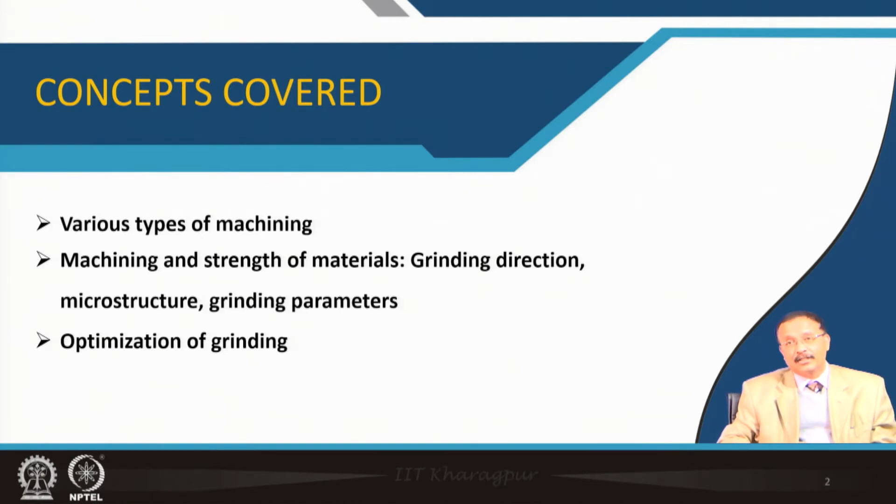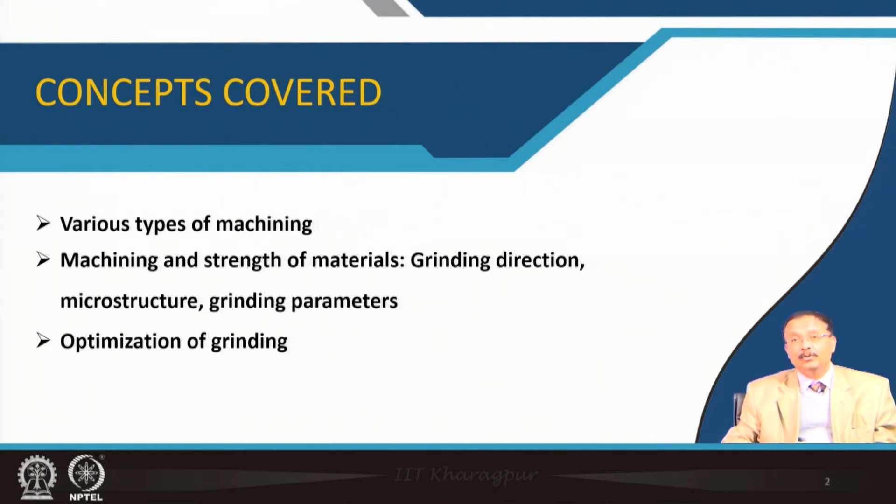For ceramics, machining is relatively complicated. First I will introduce various types of machining in a complete sintered ceramic article, and machining certainly affects the ultimate strength of the material. Factors like grinding direction, microstructure of the material, and several other grinding parameters influence the strength, and that will be discussed. Finally, how to optimize the grinding to get reasonably good strength of the finished product will be introduced.

Many ceramic surfaces, after sintering, are required to meet certain dimensional tolerance. So surface finish is also important, and to maintain the tolerance you need to machine it. Machining is not as easy as in the case of metal, because ceramic is a brittle material. If you want to polish glass or polish a turbine blade to make it more tolerant towards its dimension, it is really a tough job, a tricky job.

It is a tricky job to machine the sintered ceramic part, but broadly three procedures are followed. The first one is mechanical type, the second one is thermal type, and in some instances chemical mechanism is adopted to machine the ceramic part.

In mechanical machining, abrasive is usually mounted on the surface of some other material, and then the ceramic article is forced onto the abrasive surface, which sometimes is mobile, or sometimes you make the ceramic mobile, depending on the type of material we are talking about.

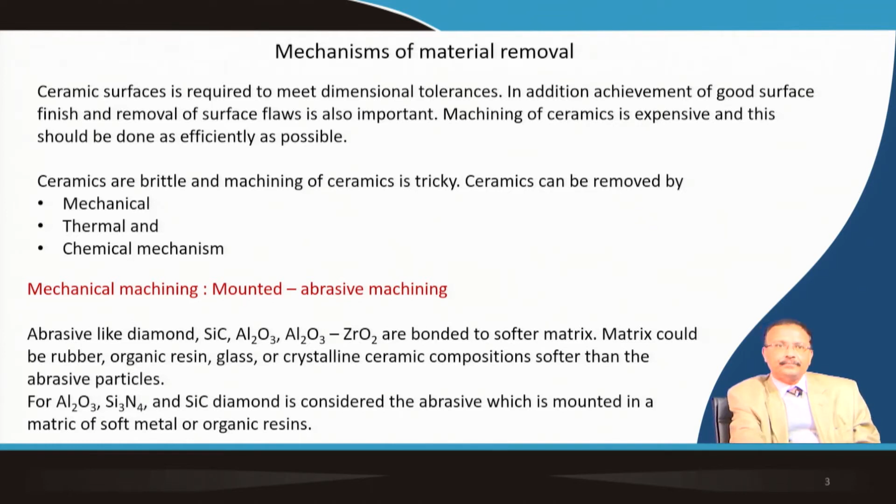Basically, four types of grinding are adopted for mounted abrasive tooling.

The first one is a conventional grinding wheel, which you are all familiar with. The second is a coated abrasive on a grinding wheel. The third has some kind of contour surface with the abrasive part. The fourth usually uses paper or cloth, with glue to attach the abrasive part - a common example being emery paper.

The removal of the ceramic article is achieved by moving the tool against the ceramic workpiece while applying pressure. The sharp corner of the abrasive is in touch with the ceramic, having a very small contact area, which applies a very localized stress concentration to remove the extra material.

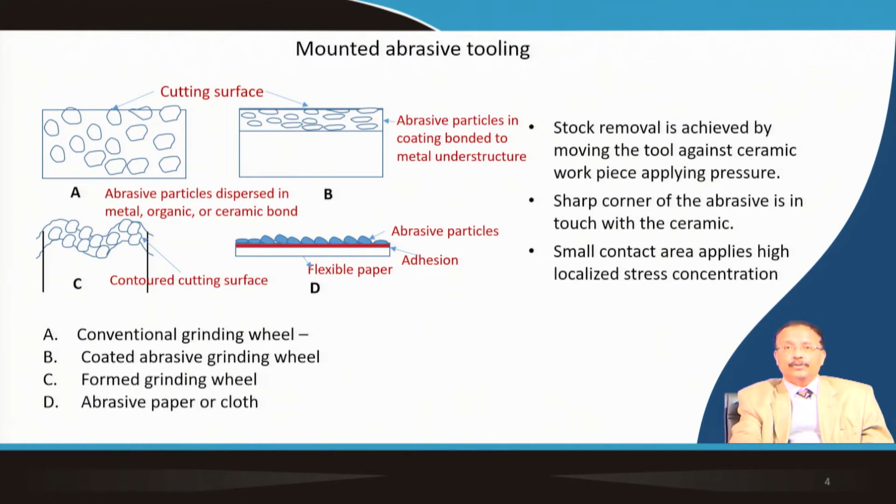Second, we have free abrasive machining, and lapping is one common example. The abrasive is taken in suspended form and put on a moving cloth to polish the ceramic article. This type of free abrasive machining is done when you need a final surface finish, almost optical finish - then lapping is usually done.

A soft cloth like velvet is used, but the removal rate of material is relatively slow. For certain bearings or seals, ceramic seals, usually a very fine surface finish is required, so free abrasive machining is needed there.

Sometimes this fine abrasive is also used to drill circular holes in ceramic material. In that case, abrasive is placed between the tool and workpiece together with a coolant, and pressure is applied simultaneously with rotation, creating a grinding action to make the hole inside the sintered ceramic.

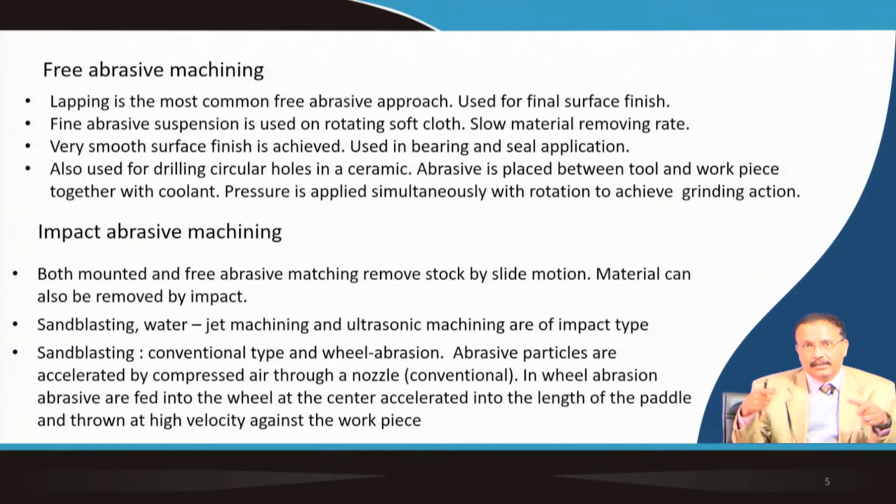In sandblasting, both conventional type and wheel abrasion are used. Abrasive particles are accelerated by air and pass through a nozzle in the conventional type. In the case of wheel abrasion, abrasive is fed into the wheel at the center, accelerated along the length of the paddle, and thrown at high velocity against the workpiece.

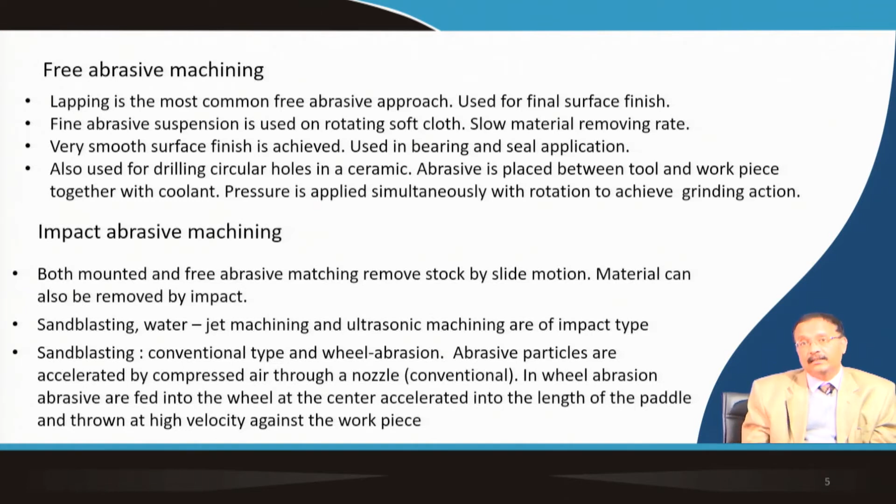This is sandblasting, basically used to clean the ceramic surface - maybe temples or old ceramic articles which have their own stains built up over the years. Sandblasting is usually used to clean the surface part.

For fabrication of engineering ceramics, sandblasting is usually not done. Wheel abrasion is also used for cleaning the surface. The size of the particle, angle of impingement, hardness, and velocity of the abrasive are the parameters to be controlled so that you can have effective cleaning action.

Water jet machining basically uses water as a carrier. It is pumped at reasonably high pressure, and this can be used to cut both metal and ceramic along with the abrasive part.

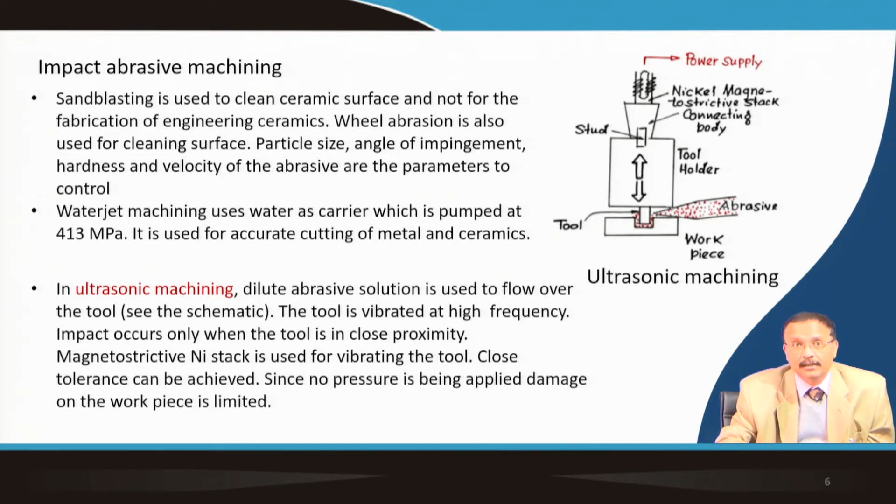The tool is kept in very close proximity, and abrasive, which is a dilute suspension, is thrown here. There is a nickel magnetostrictive stack that vibrates at ultrasonic frequency, and the abrasive particles are continuously flowing through this nozzle. There is no pressure between the tool and the workpiece, and by the simple impact of this abrasive particle along with the ultrasonic wave, a fine hole can be made, resulting in a reasonably good defect-free article.

Chemical machining is also done for the final finish, achieving a very good surface finish. A liquid is used in which the ceramic is basically soluble. For silicate glass, hydrofluoric acid can be used, or in case of alumina, molten Na2B4O7 solution can be used for the surface finish.

Where it is exposed to UV radiation, copper oxide is reduced by cerium oxide. Cerium is +3 valent, copper is +1 valent. So cerium is oxidized and copper is reduced to its metallic state.

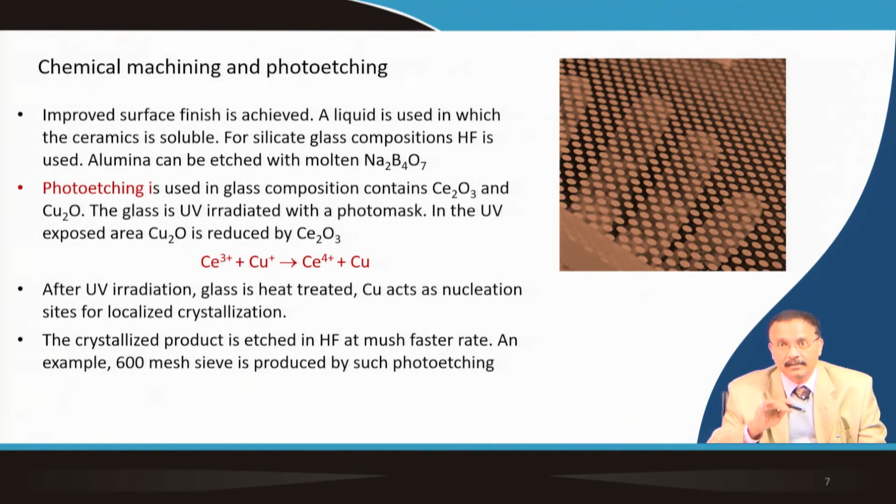You can make a very fine hole by this chemical machining followed by photo etching followed by chemical machining, producing a very fine 600 mesh glass block.

Electric discharge machining is applicable only to conducting ceramic material, or at least semiconducting in nature. This shape tool is kept in very close proximity to an electrode, and this distance is maintained by a servo mechanism which responds to the gap voltage. The whole sample is dipped in a dielectric liquid, and basically the samples are eroded by local heat.

This is one method to make bulk ceramic samples for observation under transmission electron microscope. Initial thinning of the sample, just after cutting typically a 3 millimeter diameter disc, is done by electric discharge machining to make it more and more thinner, and then final chemical polishing is done to get a region thin enough for transmission electron microscopy examination.

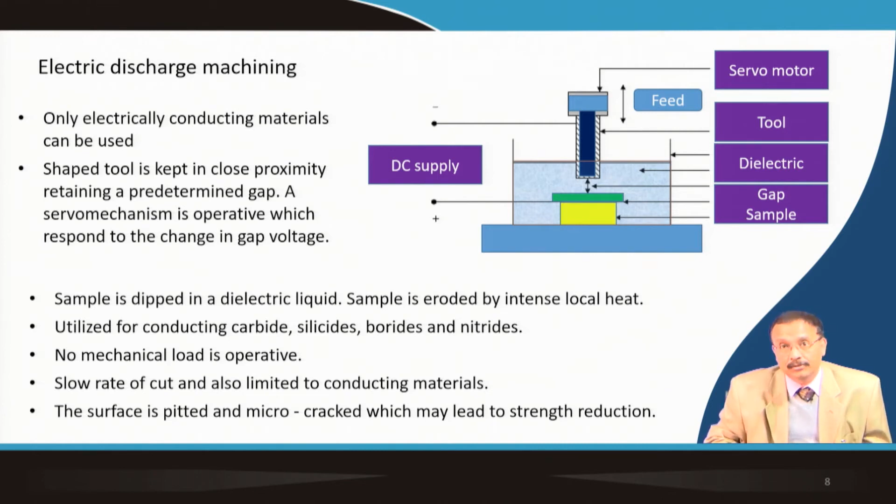This EDM is used for conducting carbide, silicide, which are relatively conducting, borides, and nitrides. No mechanical load is operative, but the rate of material removal is extremely small and the surface is not very smooth. It is pitted with some kind of micro-crack, which may lead to strength reduction for final use.

Laser machining is actually limited in case of ceramics, but in alumina ceramic, laser machining has been done. The mechanism is localized thermal shock resulting in spalling for material removal. Usually silicon carbide, silicon nitride, silicon aluminum nitride, Sialon, are machined by carbon dioxide laser, where material removal is by evaporation.

As you know, this material will decompose and not melt, as shown in this view graph. Silicon nitride rods, they are threaded, but the smoothness is quite good, about 7.5 micron, using laser machining. So laser machining in ceramics may be feasible, but its effect on the mechanical strength is not very well known at this stage, because not many different types of ceramics have been used for laser machining to test their effect on mechanical property. But this is one way to machine the sintered ceramic part.

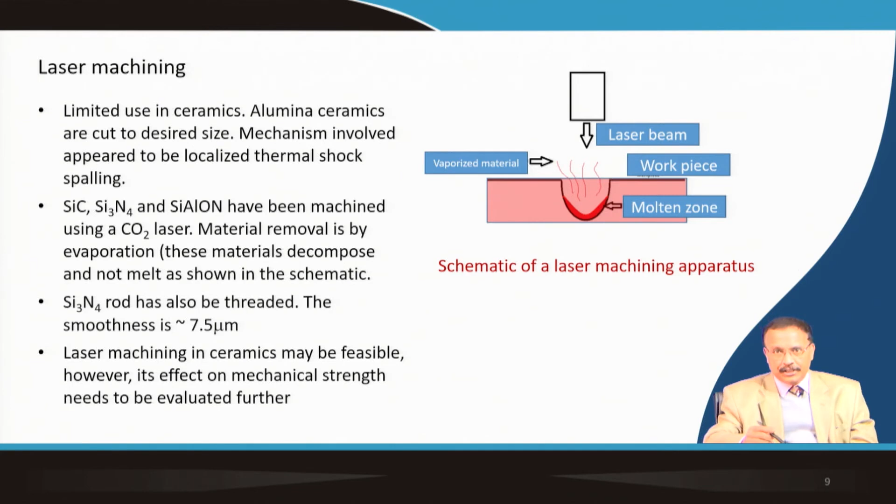Now, once a particle, an abrasive particle, is polishing the surface and removing this material, there are different types of cracks that come out. Material which is directly under the abrasive experiences very high stress and temperature, and the adjacent part will deform plastically, something like this.

So a median crack is parallel to the direction of the grinding, which is taking place in the z direction. So it is parallel to the direction of grinding and perpendicular to the surface. This results from high stresses at the bottom of the grinding groove made by this abrasive particle. These are known as longitudinal cracks, and this kind of crack actually affects the strength of the ceramic more, as far as the presence of this kind of crack is concerned.

Lateral crack, as you can see, is parallel to the surface being machined, and this actually results in chip spalling off. It is not very detrimental to the strength of the ceramic article, but this is required for the removal of the material.

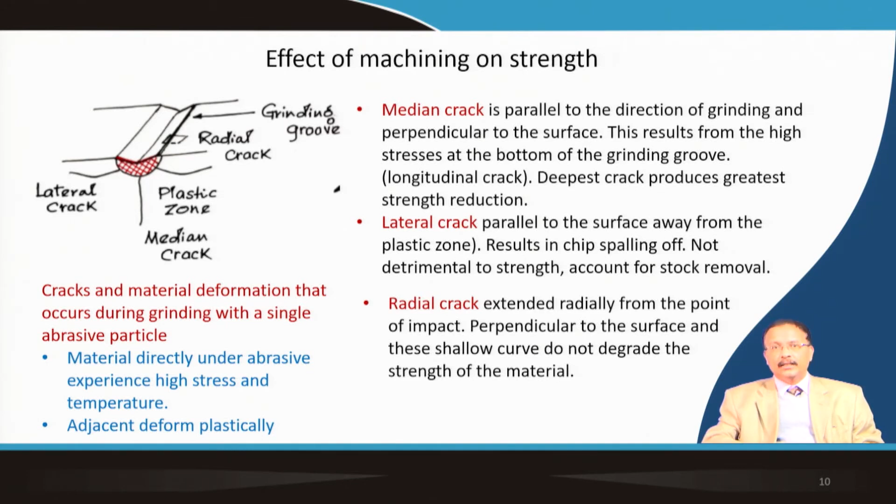Now, the grinding direction and the crack distribution actually affect the mechanical property of the material. As the load is applied during machining, the specimen begins to bend. So stress concentration will occur at the tip of the crack which is perpendicular to the stress axis, but it will not affect much the crack which is parallel to the stress axis. So here it is the stress axis.

You can see the median crack here; this crack will not be affected. But the radial crack will extend, because stress concentration will occur at the tip of the crack, and a crack that is perpendicular to the stress axis will lead to more stress concentration.

Now, if the specimen is ground in the transverse direction, which is the second case, stress concentration will occur at the median crack. So here the median crack is this one, and all the stress concentration will be along the median crack. So the strength will be affected and will be lowest for transverse grinding, as median cracks are more severe compared to radial cracks.

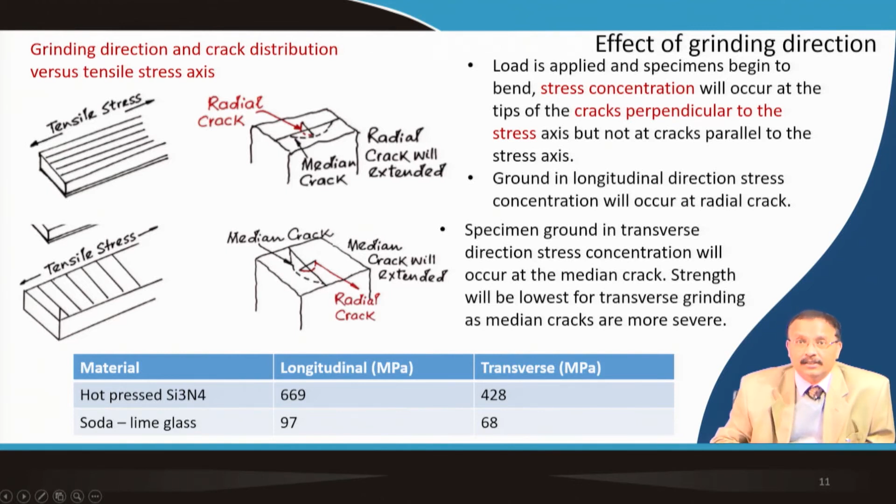This is also experimentally verified in the case of hot pressed silicon nitride. Longitudinal machining gives a strength of 669 after machining; in the transverse direction, it is 428. The same applies for soda lime glass also: in the longitudinal case it is 97, and in the transverse case it is 68. So the direction affects the mechanical strength.

Microstructure also plays a major role in the rate of machining. I have considered fine grain ceramics of four different types, A, B, C, D. The finer ones require more grinding force and take a longer time to get machined. Ceramics having uniformly distributed porosity have an increased rate of machining, however this deteriorates surface smoothness. If you have porosity left in the material, your machining rate will be expedited, but due to the pores, when the surface is exposed it will be rough and you need to repolish it, which will also affect strength.

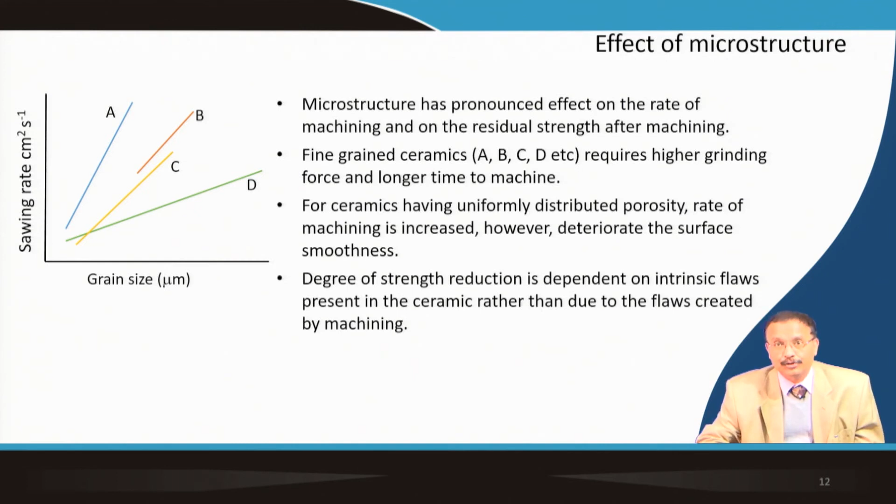So the degree of strength reduction depends on the intrinsic flaws present in the ceramic, which affect more compared to the surface flaws created by machining. So again, it is of utmost importance to sinter the ceramic material to the full extent, so that internal porosity and the presence of cracks and voids are grossly minimized.

So, the grinding parameters are tabulated here. These are the parametric variations. You can just think of it and you will be able to understand their effect. For example, increasing abrasive size, certainly if you have large size of abrasive, then machining rate will increase.

The tool will also wear more, and material strength will get reduced because of this larger surface flaw. Likewise, the increase of downfeed, increase of wheel speed, use of lubricant or coolant while you are machining the ceramic, increase of abrasive hardness or changing the abrasive concentration in the wheel bond

they will all have their own effect, and you can use your judgment to see. For example, if you use lubricant, then certainly the heat will be dissipated more, so that may increase the machining rate. If you increase the abrasive hardness, then it will be easier to remove the material.

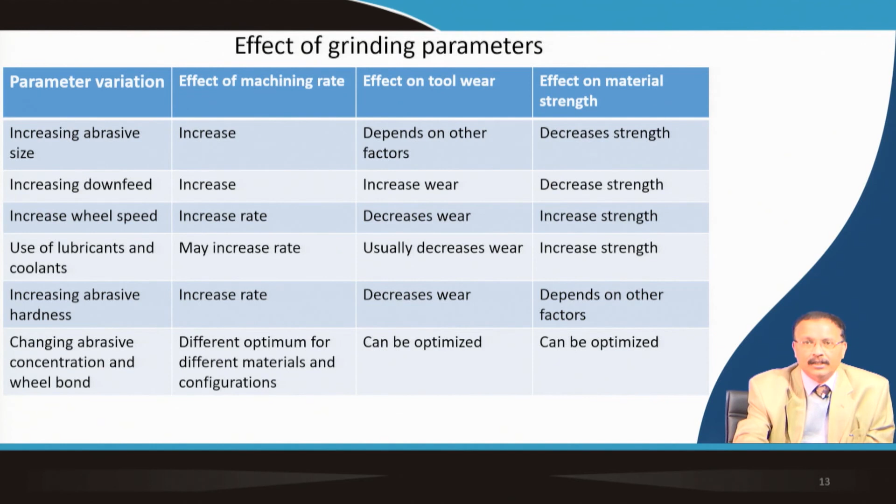So likewise, this grinding parameter's effect on the machining rate, effect on the wear of the tool, the erosion of the tool, and finally on the strength of the material can easily be understood. So finally, you will have to optimize the grinding.

Lapping is one such method. In case of lapping, progressively you use higher to lower size of abrasive. Rough machining is usually done by 200 grit diamond, and then as the number increases, it becomes finer and finer, so 320 and 600 grit of diamond.

I have already explained that in case of glass, tempering is done to remove the internal stress to make it more strong. So annealing is having its own effect after the grinding operation.

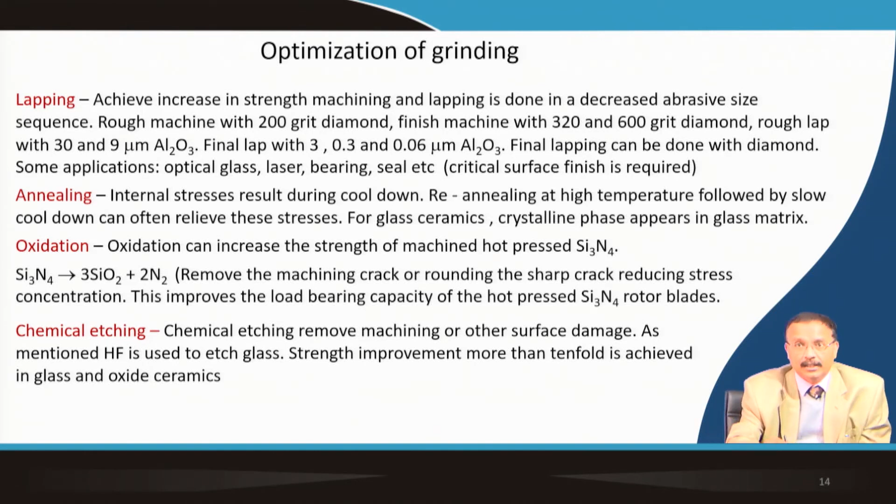Surface compression is also used for glass, either by use of chemical or by heat treatment, that actually yields a compressed layer on the surface. If you are applying a tensile load, it will have to overcome this compressive stress before it fractures the material. So that is found to be useful.

In case of ceramic tile, sometimes a glaze is applied on top of it. That glaze has a lower coefficient of expansion than the matrix, and the surface is always under compression.

In case of laser, usually flame polishing is done, and it reduces the size and quantity of the surface flaws. The rod is basically rotated and passed through a flame, so that the thin surface layer basically melts.

Apart from strength, various other properties of the material are also affected. For example, the shape of the hysteresis loop of the ferrite is changed by surface stress resulting from this kind of machining. Certain electrical and optical properties are also affected by machining and surface conditioning techniques.

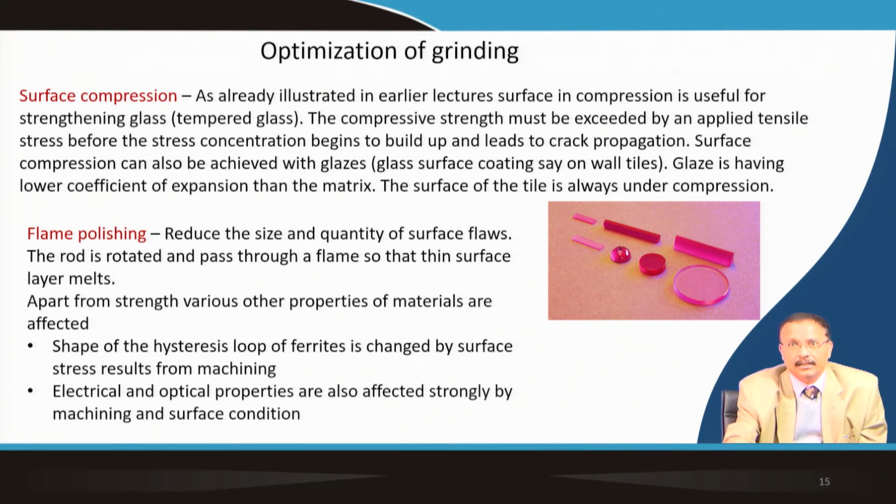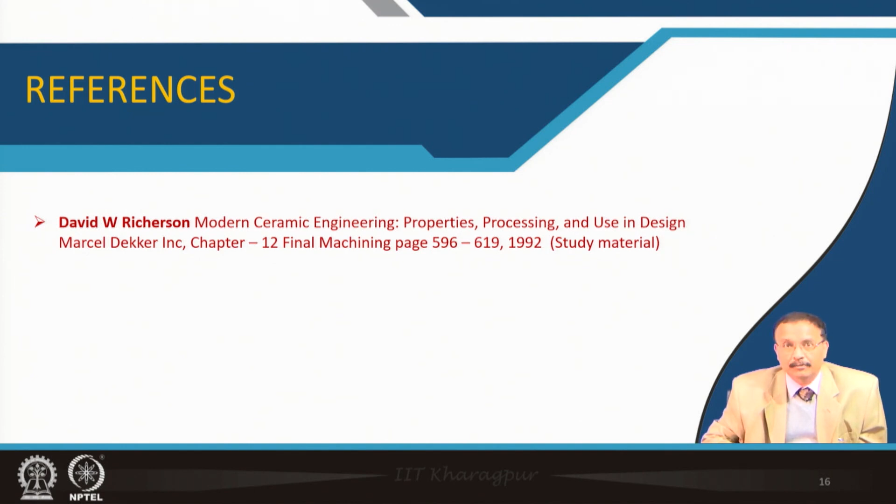The reference for this part of the lecture is a book by Richerson, chapter 12, final machining. You can use it as a study material.

Mechanism of material removal is explained, mounted abrasive machining, free abrasive machining, impact abrasive machining has been discussed, chemical machining, photo etching, electric discharge machining, laser machining - these concepts have been introduced.

Then how machining affects the strength, the grinding direction affects the strength, microstructure plays a major role to control the strength of ceramic after machining. Then several grinding parameters we have introduced, and finally optimization of the grinding in terms of lapping, annealing, oxidation, chemical etching, surface compression, and finally flame polishing. These concepts were described. Thank you for your attention.